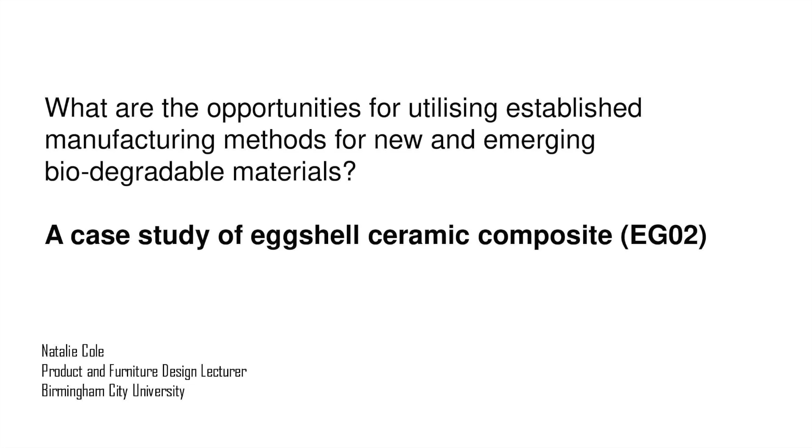My name is Natalie Cole. As Claudia said, I'm a lecturer at Birmingham City University on the Product and Furniture Design course. And my area of research is bio-based regenerative materials and scales of production. The research is still in its early stages, but I wanted to share my first case study from it.

But what if the material we were to use were not finite? What if the more material we used, the better it was for the planet and the environment? Biodegradable regenerative materials could potentially be an answer to this. Regenerative materials are made from plentiful sources of natural ingredients, such as abundant plants or crops or agricultural waste. They are biodegradable, so they break down to feed nutrients back into the soil at the end of the product's life, creating a closed life cycle rather than a linear one.

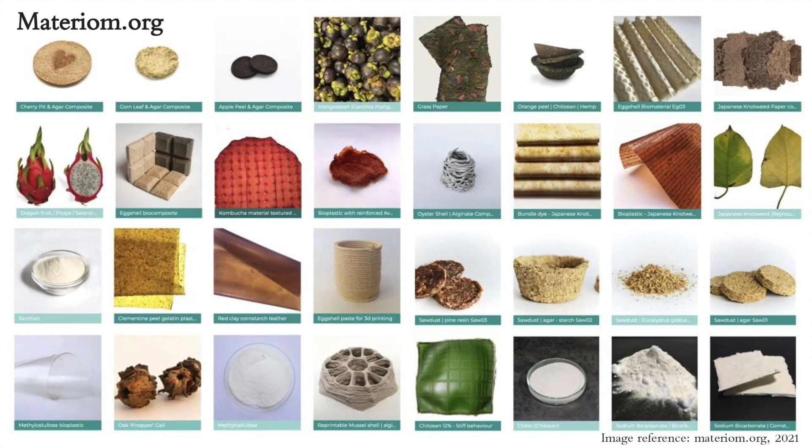So there's a growing number of biomaterial recipes being shared online and on open source platforms. And the website Materiom, which is what this screen shows you, is an amazing resource where material designers share their recipes and basic instructions so that anyone can make the material at home in their kitchen. But with this new generation of materials, methods for working with them need to be developed. We obviously have large amounts of knowledge and reference material and data that exists in relation to processing traditional materials, but understandably there is a gap when it comes to new biomaterials.

So beginning with eggshell composite ceramic, my aim is to look at a series of biomaterials to determine if they have the potential to be used in mid to large volume batch production or potentially even mass production processes. So my approach for selecting the first recipe wasn't overly scientific, but it's quite a nice story. The material was developed by an industrial designer and materials researcher called Madushi Kocher, and she made the recipe available online on the Materiom website.

She's based in New Delhi and the Netherlands and is the founder of YLEM, a circular design and research studio. And the first prototype she made from the material was her eggware range, which featured disposable plates and cups for street food. And since then, Madushi has developed a range of products using the material, as well as developing other biomaterials as well. But to date, her focus has been based on craft processes and small-scale production.

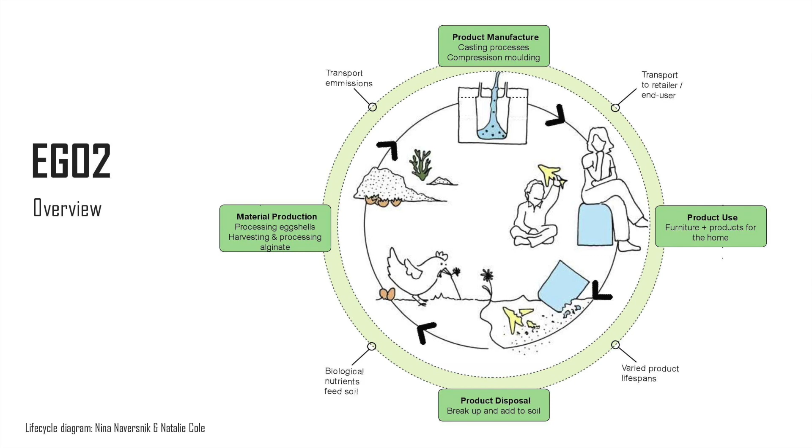Just to tell you a little bit more about the material itself, it contains only 3 ingredients: eggshells, which are an agricultural waste byproduct, alginate from brown seaweed, which is an abundant natural crop, and water. And the resulting material is completely renewable, non-toxic, and at the end of the product's life, it completely biodegrades. And no specialist equipment is required to dispose of the product. You can simply add it to the soil and it biodegrades, and the bionutrients feed the soil, closing the loop.

Existing manufacturing methods, technologies and infrastructure for traditional materials processing, and these initial explorations allowed for approximate recreations of what happens in industry before moving on to more refined tests. So one of the most successful methods of working with the material was compression moulding. It's a process already used for forming several different types of material, including rubbers, ceramics and thermoset plastics. The process in industry generally starts with granules, but for me, I was using the viscous, thick liquid material in that state when it was moulded.

A 2-part male and female mould is used, which creates the form. This means it's suitable for simple forms with no undercuts. The process is ideal for producing parts that require large, thick-walled solid sections, although it is a little limited in terms of the complexity of the object that can be achieved. But I just wanted to demonstrate some of the properties. So that plant pot is me standing on it upside down. So it can take a substantial amount of weight. So in particular orientations, it is very strong.

Compression moulding was also used to make this clock from the eggshell material. Just to give you an idea, there's about 130 eggshells in one of those clocks.

Injection moulding was also looked at. This is a process obviously normally used for plastics. So to replicate this, I used pressure to inject the material into the mould. There were quite a lot of challenges in terms of the viscosity of the material and the air bubbles, which you can see in that image along the bottom. But nevertheless, I think there probably is potential to explore it a little further.

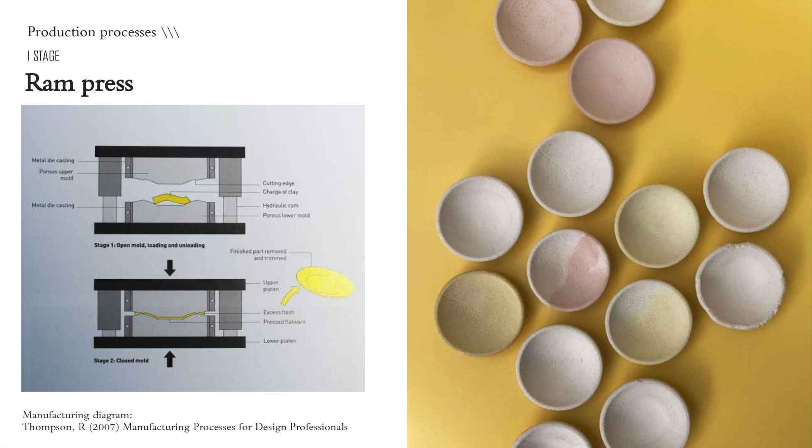Another process I tested was ram pressing. This is generally used in the ceramics industry for mass producing tableware. A 2-part mould is used again. Under high pressure, the top part of the mould is pushed down onto the bottom part. The top of the mould has a cutting edge to it.

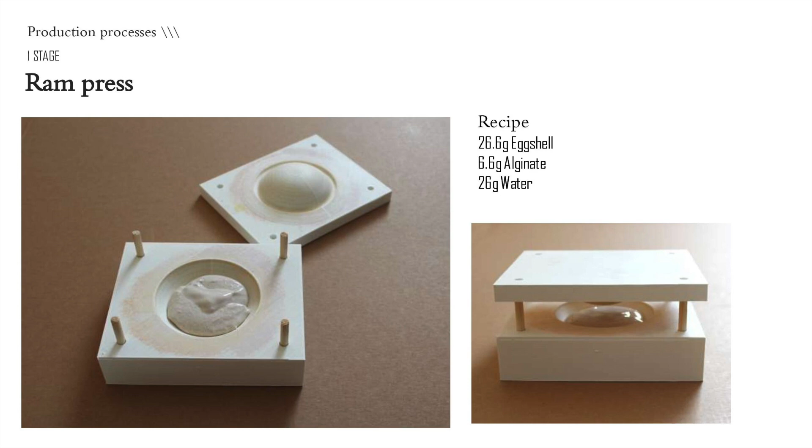So the lower mould is charged with the material. The 2 moulds are forced together under pressure. And then within 2 minutes, the material sets and the mould is opened. And that cutting edge on the mould means that any flashing can just be peeled away and removed.

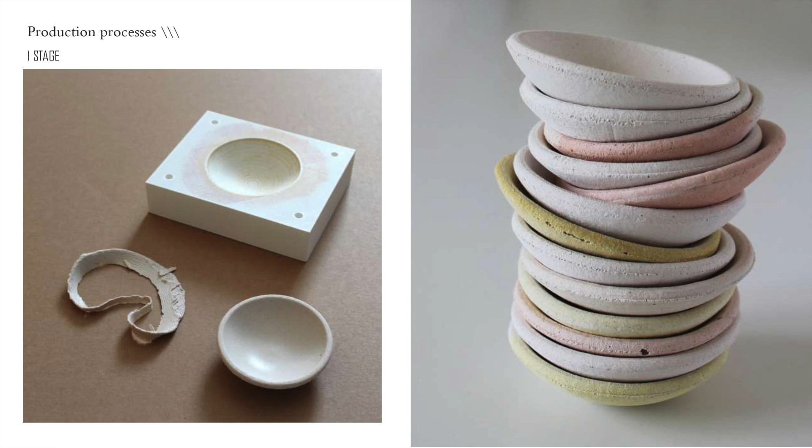The final bowl removed from the mould is simply left to dry, and you can see sort of multiple samples there on the side of experiments that I went through trying to work out the correct consistency for the material and how to avoid air bubbles in the moulding process as well.

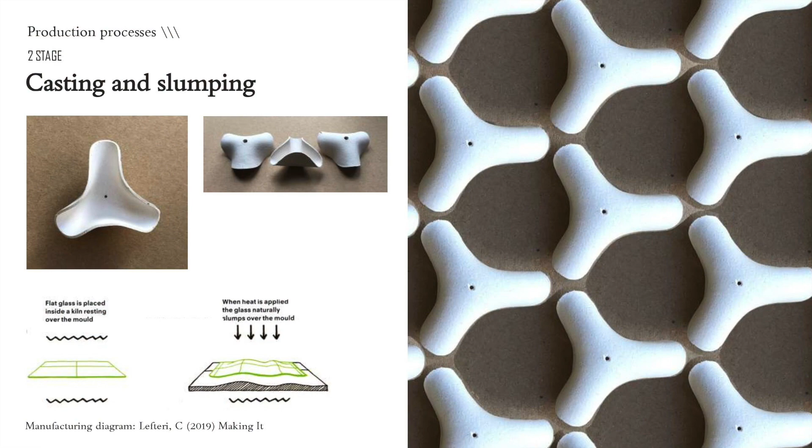So as well as those 1-stage production processes, I looked at some 2-stage methods because of the material's unusual properties. So the first stage here was to cast a thin disc, a thin circle of the material. Once it had gone to its set rubbery state, I then slumped that disc over a second mould and left it to dry, taking on the form of the second mould.

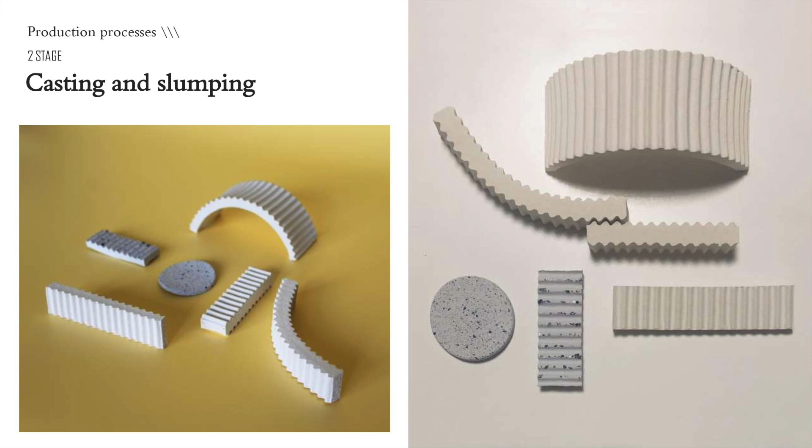And these are some other examples doing similar kinds of things, casting a sheet of it and then slumping it over a secondary mould to take on another form. Through the experimentations with the material, it's really clear that there's a lot of interesting properties to the material that could be exploited through the design process to create biodegradable products and furniture.

Both the ram moulding and the compression moulding showed potential for larger volume production methods and are worth pursuing further, ideally, I think, through a collaboration with a manufacturer to test this. There is still quite a long way to go, though, to get there.

And although these initial results show that technically it might be possible to use established production methods, there are lots of challenges as well. Preparation of the eggshells is a key stage in the production of the material. And the shells all require boiling, then drying, and then milling before they can be used.

And whilst machines do exist on an industrial scale to do this, a number of UK-based egg breaking companies have stopped using the kit. I've been in contact with 3 different companies who all used to have the equipment but no longer use it because of the impact in terms of the energy usage.